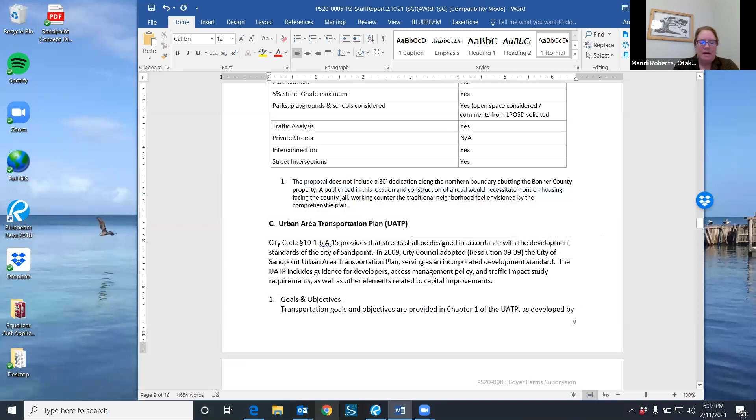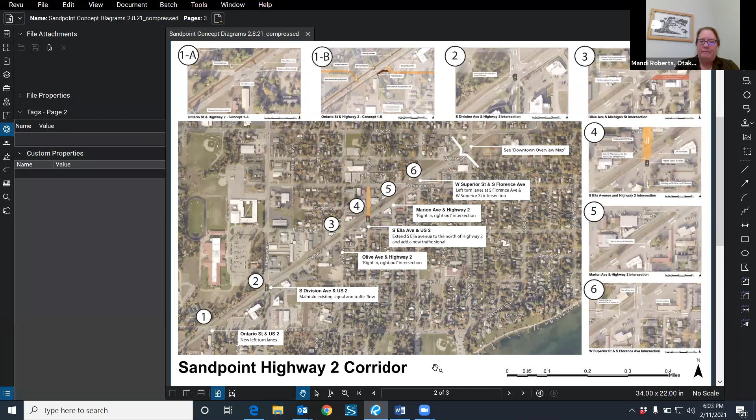Okay, thanks, Amanda. Are you able to bring up the Baldy Mountain concept first? I think we'll talk about that one first. All right. Thanks everyone for joining us tonight, and Preston and I will work together to present some of these concepts and ideas to you. The first one we're going to talk about is the Baldy Mountain Extension, which is a concept that's been around for a while. There it is.

In our study process, we really validated the need for this and met with a lot of different stakeholders who felt this was needed, including people in trucking and industry, who feel a more direct connection to Highway 2 would help their efforts. In conjunction with that, there is a need to focus on north-south traffic through Sandpoint, and Division Avenue has been another key study area for us, in particular because it's a corridor with a lot of different uses in the community. There are multiple schools and community destinations along that corridor, and right now it is used for trucking and freight movement as well.

So in looking ahead and thinking about the future of Division Avenue as a safer corridor for all users, including pedestrians and bicyclists, the idea of creating this extension with Baldy Mountain to the highway really has a lot of merit, because that will help take some of the trucking access and traffic and move it directly to the highway and points north and south from there. Those truck trips then would not necessarily have to go on Division as they do now. So I'm just going to quickly cover a few more of the issues, and then maybe Preston, if you wouldn't mind walking through the solution that we have here, that would be great.

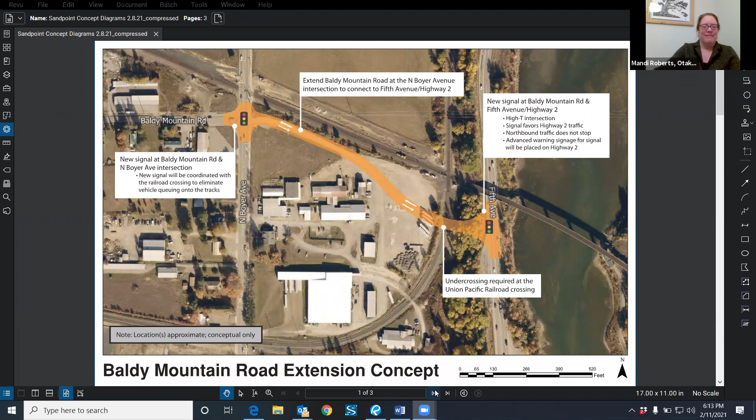Great. Oh, sorry. Okay. All right. With that, if you think of anything else on this concept that you'd like to ask at the end of the presentations, please feel free. We're happy to go back to this concept if anything comes up in the meantime. So with that, we will go to our next concept here.

Yeah, and I'm sorry, I have a little bit of barking in the background, but I think it's calming down, so sorry about that.

So I'll just say a few high points about this. This area of the Highway 2 corridor is located more on the southern gateway to the town. And we have several different concepts that we're looking at in this area that we're going to go through with you. And some of the key issues, which I'm sure everyone's well aware of in the corridor, is that we have numerous access points onto the highway. And we also have skewed intersections coming in at different angles. So that makes access sometimes a little bit challenging for people getting across. Also, it can affect traffic flow, and there are crash occasions that happen along here.

So it's not as intuitive for motorists and for active transportation, walking and bicycling, as we would like it to be. And there are several improvements that we can make to really make this corridor function better for all modes of traffic. So with that, Preston, do you want to kind of walk through some of the solutions? And we might break periodically, because I know we have quite a few to cover, but maybe do 3 or 4 intersections, take a break, and then continue on.

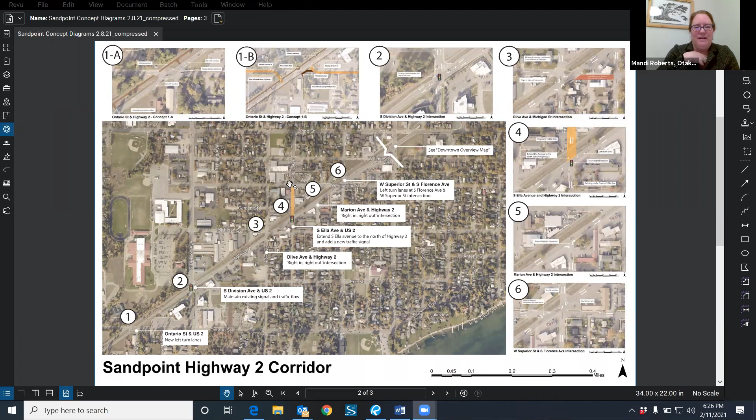And also just before we go a little bit further north here, closer to downtown, and talk about the Boyer area, just wanted to see if we have any questions or anything before we move on. Looks like we're good. If we want to bring up the next graphic, we can take a look at this.

So this is definitely a concept that we've studied very diligently, but it's still a planning level look at what could happen here in the future, and it does need further preliminary engineering, but we've kind of thought through how to facilitate better north-south access through the outskirts of downtown, and in particular, better connect people going east and west to the Highway 2 corridor on 5th via Pine. And we talked about that in one of our first meetings, I believe, how Pine, through the recommendations of this plan, will become more of an east-west route connecting through town, which we think will be really great to have.

So with this area, I'm going to turn over to Preston to kind of walk us through what's happening here, because we are calling it the couplet. So we are looking at a southbound route for traffic as well as a northbound route on 5th. So you want to give us a description, Preston?

You bet. All right, well, maybe we'll start here at the northern end and work our way down south as we describe this. So as you go south of Cedar, it breaks into, as Mandi mentioned, a couplet. That means we just split the two directions of traffic. So we have southbound over here, that's southbound only, one way. And then on the other side, we have northbound only, one direction only. And what splitting the traffic directions does is it helps distribute your delay of vehicles and helps your intersections where you have signals operate more efficiently because you only have one set of traffic to deal with.

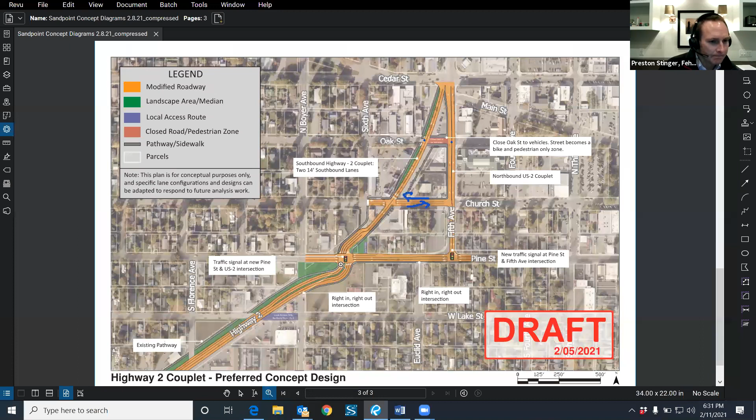Okay, so now let's talk about Boyer. Amanda, I wonder if it would be helpful to zoom in a little bit on that section. That's great. Perfect.

Okay, so at Boyer, today the intersection's down here to the west, southwest, I guess you can say. And it's a little bit messy because of how close some of these intersections are of Pine Street and Boyer that sit over here today. And there's a lot of queuing that happens all the way back here and blocks the intersection in different directions. It's a one-way section on Pine Street right in this area today.

And if we want to try to make this a nice east-west connection and make this a good grid network and continue our arterial through that area, we're proposing to rearrange this a little bit and as much as possible tee things up, meaning make 90-degree angles as much as we can to reduce the length of crossing intersections, both from a vehicle standpoint and from a pedestrian and bike standpoint, and that helps us by making things square as much as possible. So that's what we're trying to do here. Obviously, it's going to be a little bit cleaner than what we're showing here from a schematic standpoint, but we just wanted to illustrate the purpose.

So with this, we have the southbound of the couplet coming in here. So this is southbound traffic only. Northbound traffic is coming up US 2 here, and they can either turn left on Pine Street and go that direction, or they can continue on with the US 2 route and go right there, and then either go east on Pine or left and go north on 5th Avenue to continue up US 2. And this would be a signal here.

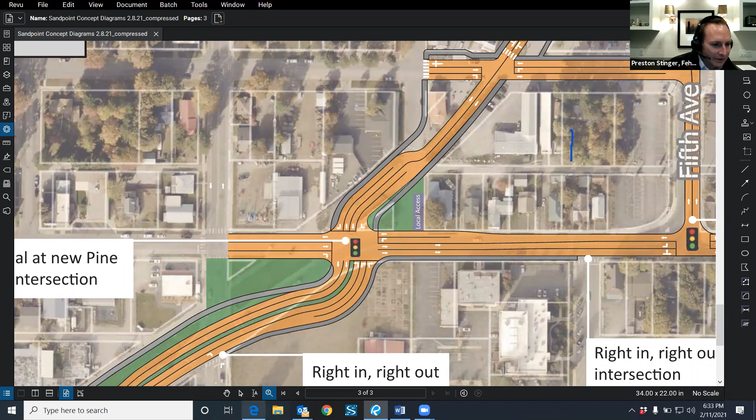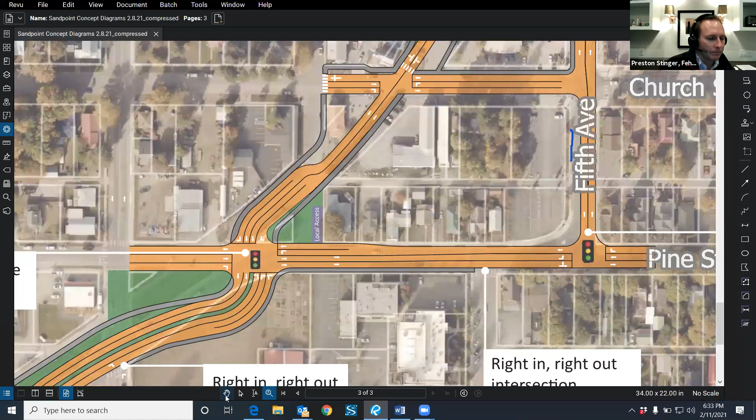So we're showing a sidewalk here on this south side of US 2, and that would continue. You probably wouldn't be able to see it on those other figures we were showing of the bigger picture of US 2, but the plan would be to have a sidewalk on this side as well, all the way down to provide good pedestrian access.

The other side of Highway 2, this is a multi-use path. It may look like the same width as the sidewalk on the other side, but this is intended to be a wider path to accommodate both bikes and pedestrians, two-directional travel, and have a nice buffer of green space between them and the vehicles, so that it's more comfortable for them to ride and feel a little bit safer with that buffer.

And then over here with this new area of Boyer, that's now a right in, right out through here. We'll still have access here as well, so that these businesses that are here and Dubs that is here will still have access over on this side as well. And then you still have Lake Street as well that continues that way. And this would function essentially the way it is today in terms of the intersection, but we just have some reduced movements as you connect to US 2.

And I might mention too, I can't emphasize enough that this is really, we've been calling it a diagram. So it's very conceptual, and this really does need to go through the preliminary engineering phase. But just on that note, we're not really showing things like crosswalks at the Boyer intersection or the new intersection, I should say. And so those of course would be part of the design.

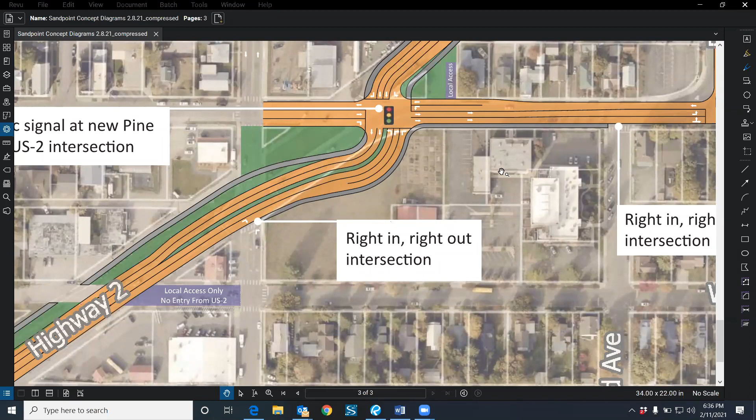And I see that we have some questions coming in, so I will stop talking and maybe we can answer a couple of those. Yes. I'll read them. Oh, go ahead. No, I'm sorry. I was just pulling the screen up. Perfect. And I can turn my camera back on here.

There we go. So a question that came in is, what was the thought process in eliminating a left-hand turn from US 2 onto Boyer? This will most likely cause a significant amount of traffic on side residential streets as people try to access places like Dubs, Winter Ridge, or even Memorial Field for large events. Good question. And I know, Preston, you've put a lot of thought into those left-hand turn movements. Can you help us understand that?

Yeah, I'm sure that you're talking about the left turn this direction, which is a great question. Just to clarify, we are allowing left turns from this direction that then gets you to Boyer up here, but I'm assuming you're talking about here down to the south. So right. Yes, that would be restricted. Trying to fit in a left turn lane here with the potential of that backing up to the nearby intersection here is the main reason for restricting that.

There are ways to get to that location, from big picture, looking at the city and the grid network. That's what the city thrives on, is having multiple ways to get to a location, not just a single way. So from here, about 1,500 feet to the south of us on US 2, we have a new signal that is planned for Ella, and that would be one location. You can make that left turn, or U-turn and come back up US 2, or work the grid system and make your way up that way.

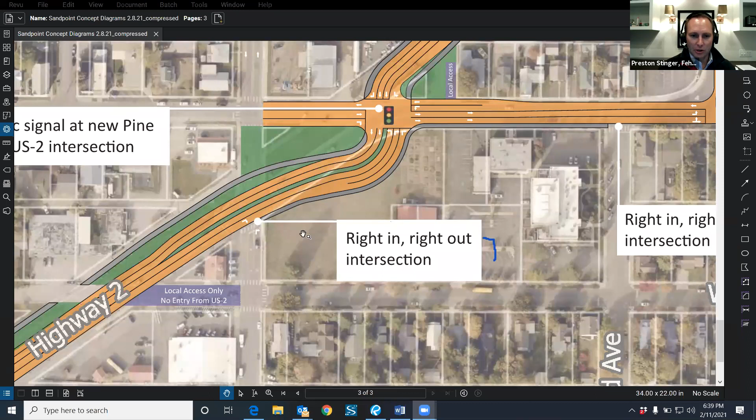It's just some different movements you'd have to make to get to that location. Good question. And Preston, I guess another question I'll ask in conjunction with that as we're looking at it. So if I were coming from Cedar Street, let's say, heading southbound on the highway, and I wanted to go to Dubs or Winter Ridge, wouldn't it also be possible to take this left turn and head down Pine and then back this direction?

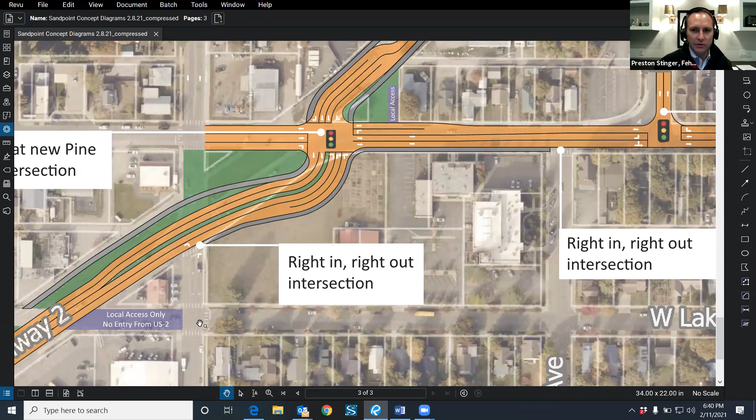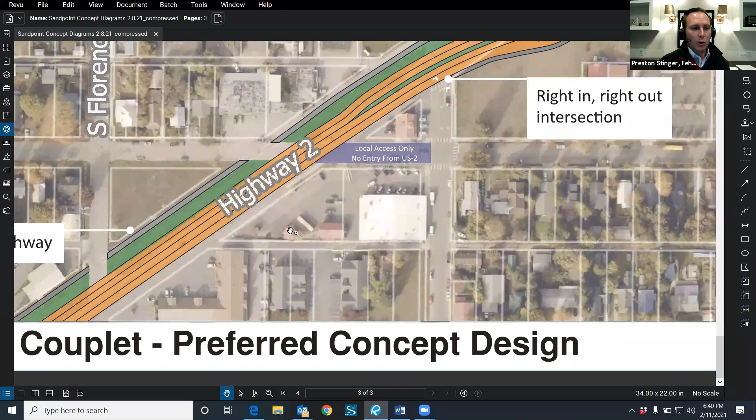Yep, that's another location. And actually another even closer location is at Superior and Florence Street, which we are allowing left turns in at that location because we have good distance between it and the other two signals north and south of it. So at that location, you can do a left turn on Superior and then come in from the backside up onto Boyer, or you can do a U-turn at Superior on US 2 and come back up and do that, which is even shorter than the Ella option I just gave you.

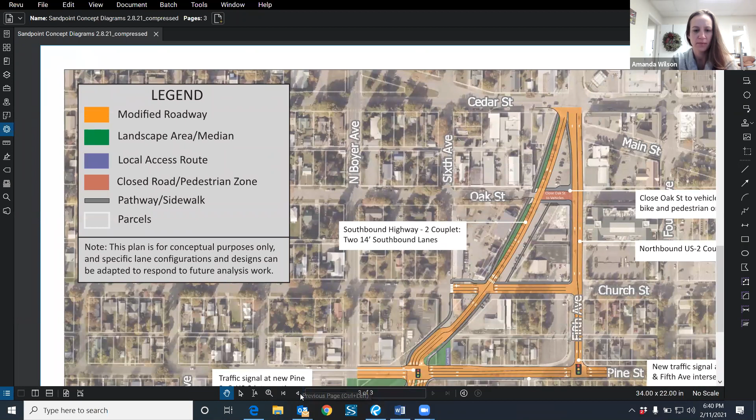I was thinking, I just want to pull that up. Sorry here. Struggling to drive with my image. There we go. Okay, so yeah, right. Oops, sorry. No, that was my bad.

Sorry about that. Instead of turning left here today, like you do, you would continue down here and either turn left here to get to Boyer and go whatever direction you want to go, or come to Superior, do a U-turn and come in that direction right there. Or as Amanda mentioned, coming in off the couplet up here and then doing this movement.

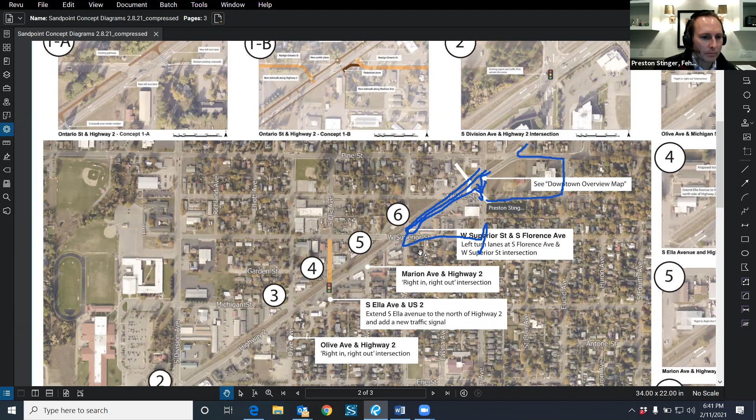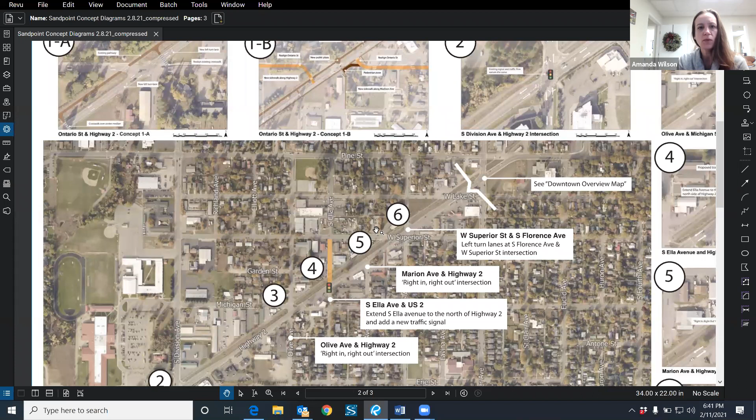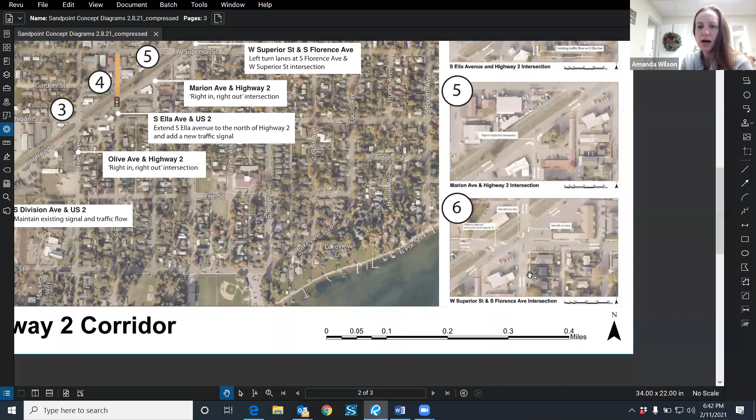And I think we need to take a closer look at Superior as well, and just kind of how that's functioning overall, specifically with this west side of the highway here. This intersection can get a bit congested given all the different turn movements there. So, I think that our image is on 6. Right, so having the left turns here as well as right turns in, this is an area of quite a bit of conflict. So I think that is another area we'll take a closer look at, but I fundamentally agree with you. There's multiple different ways to get to that destination.

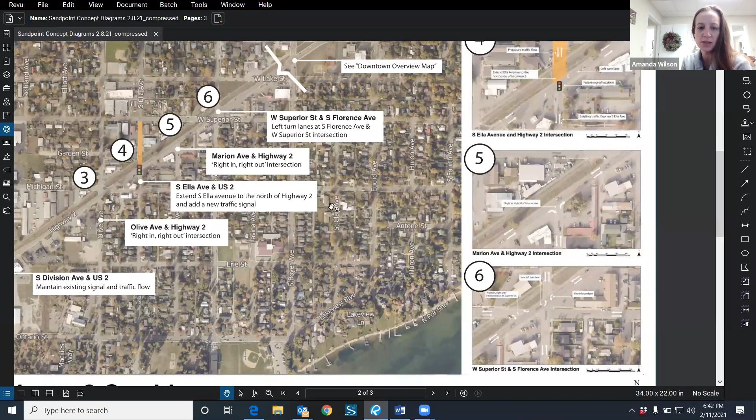And really the point here is to minimize turn movements onto US 2 or from US 2, those left turn movements, as well as utilize that grid system. So the second part of the question, which I think I'll go back to this one, is would there be access from Lake Street onto US 2? So for example, let me zoom back in here.

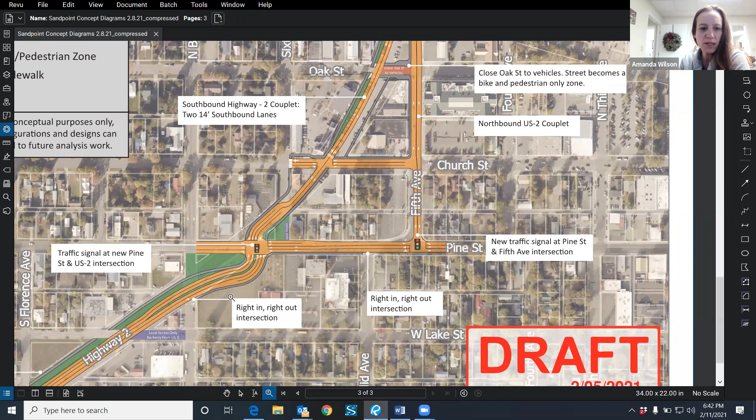And this is one of those areas, as Mandi mentioned, when we get into the preliminary engineering, we'll be able to take a much closer look at how all the dimensions work and how the layout would function from a width perspective here. But the question is really, if you were on Lake, would you be able to go straight through and get on to US 2? I think the question is closely related to parking. Currently, this is a location of parking for both of these businesses here. And Preston, unless you have more to add to it, I think the intent was, at least initially, for this to be restricted, and it really needs to have a closer look at the dimensions.

Yeah, that's right. Ideally, this would be restricted there where there wouldn't be access. This would just be accessed from the Boyer side of it. And if you're on Lake, you'd access Lake to US 2 from that direction, or vice versa. This direction would be your access to Lake Street to US 2. So instead of traveling this direction on US 2 to get to Lake, you're just changing your direction over to that one.

And also just to mention that the idea would be to design that area as local access only for parking, and you might even be able to have expanded parking in that area by doing that. So, but as you said, Amanda, it really needs to be looked at a CAD level of detail. Yeah, I think absolutely.

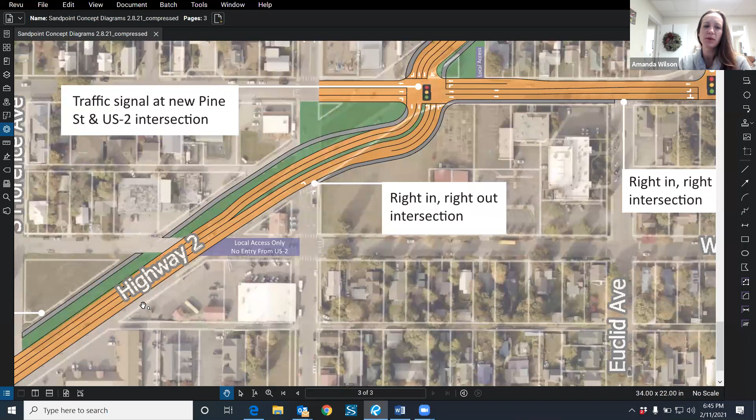I mean, before we would move forward and throughout the whole preliminary design process, that's part of our normal efforts to really engage the adjacent property owners as we start to work through those dimensions and kind of collaborate on what makes the most sense here, recognizing that, again, the overall goal is from a safety perspective for all modes, pedestrians as well as motorists and bicycles, to start to, I'll say, clean up, if you will, a little bit, all of the different access points that we have along US 2 to really help with not only mobility, but primarily safety as well.

So we have lots of entrances. We have one here, here, and along this corridor. So the intent would be to maintain the parking and make sure that we can have safe access.

And I don't think we have any other questions at this time. However, certainly welcome any of the attendees to raise your hand if you have heard something you'd like a little bit more information on, or any other concerns. And it doesn't have to be just specific to the concept that's shown on the screen. If you thought of any questions about some of the other concepts we've provided in the other workshop series, we are happy to discuss them this evening.

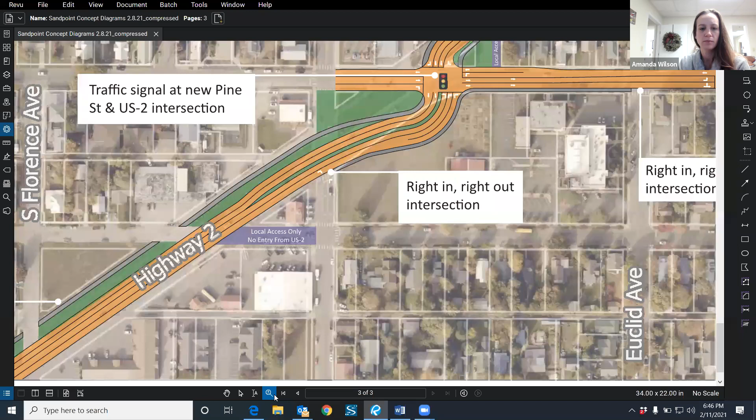Melissa, do we have anyone raising their hand that you see on your end? Amanda, I'm not seeing anybody, no.

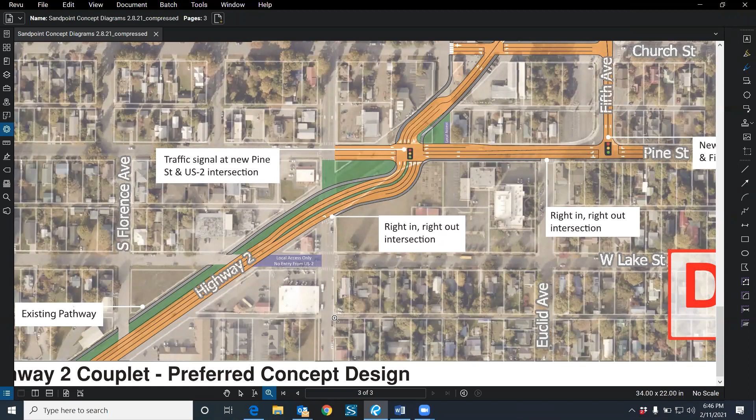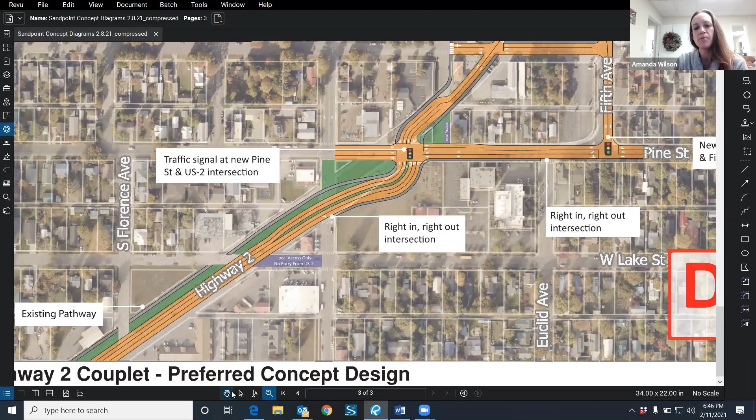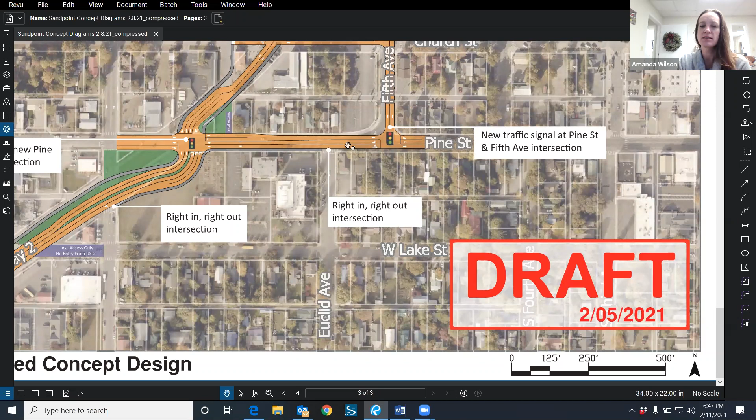Okay, thank you. I guess one last point, Mandy and Preston, I think that as we move forward with this draft plan, in our part 1 series, we showed the concept of how Pine Street really will, in the long term, serve as that east-west connection from Highway 95, for those folks, let's say, coming from the Sagle area that want to get over maybe to, let's say, Dubs. I'll just pick on Dubs in this case. So if you're in Sagle and you want to go to Dubs for dinner, using Pine as that east-west connection, I think this long-term approach really helps to provide that connectivity.

I think the community overall, we've heard a lot of feedback about the frustration around Pine Street being one way between 5th and 4th. And this does a nice job of cleaning that up, eliminating, as Preston mentioned, that signal at Church. I will also say I really commend our team, Preston, as well as Mandy and everyone at Otak and Fehr & Peers that's worked really hard. What I appreciate is as we've come up with these solutions, there's been a real conscious effort to dive into the details on the data and the modeling to make sure that we're trying our best to get ahead of any unintended consequences and taking a deep dive into a thorough analysis. So thank you both for doing that.

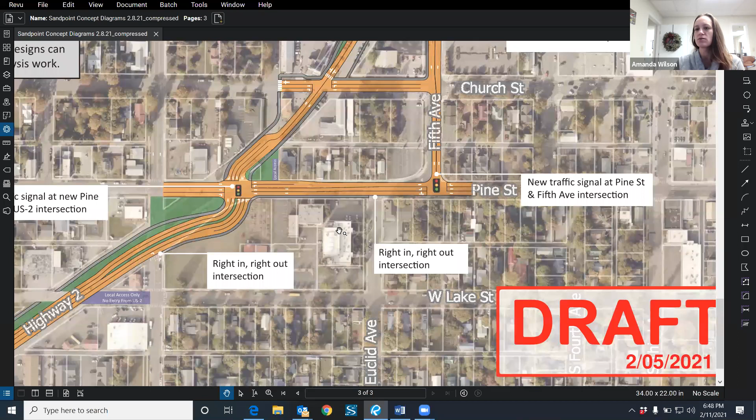I appreciate that we've taken a look at the signals and the modeling associated with that, and anticipate that these solutions will provide for not only better flow for all modes on US 2, but really for all of our side streets, providing that arterial in both the east-west and the north-south direction. People tend to obviously pick the path of least resistance, and so making this function has, I would say, intended consequences for some of those neighboring streets where maybe we're getting a little bit of cut-through traffic, and that's less safe for, say, pedestrians and bicycles. So giving them the right place that they can be on a system that's designed for them, I think is important. And I think our team has done a great job of achieving that.

So again, thank you. And we'll see if anyone on the call here tonight or the workshop has any final questions for us this evening. It's been a quiet crowd. All right. Well, hearing none, thank you everyone for participating this evening. Oh, I should have paused more for someone to type.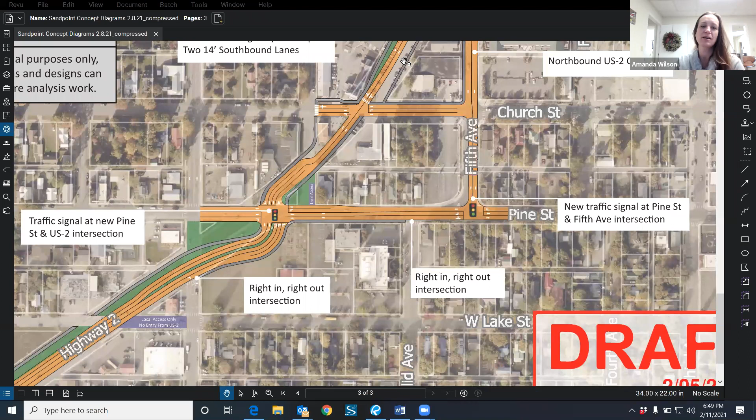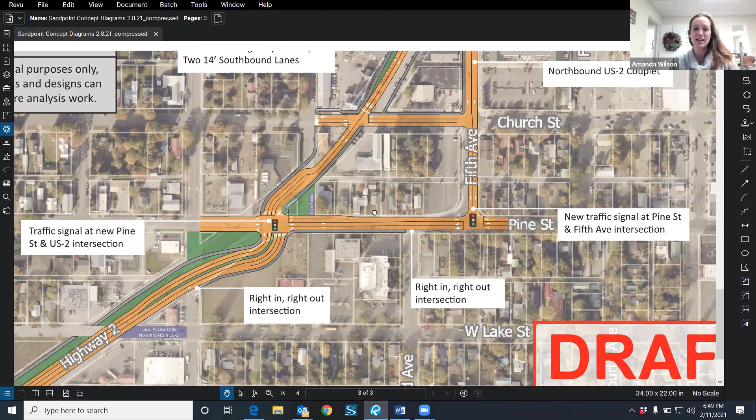I appreciate that comment. So it says, looks like a modified version of the original curve design. Looks good. Thank you so much for that. We really appreciate it. Yes, our team worked very hard at taking a look at that initial curve design from a few years ago and building upon it. And I think that the end result has come really far. So thank you for that comment.